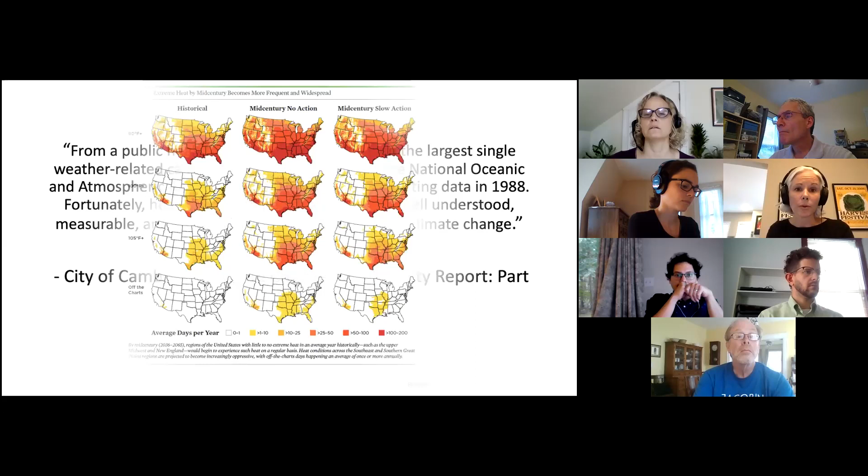First and foremost, heat is a real public health issue, and it's been acknowledged for a long time. It's been the largest weather-related cause of death in the US since NOAA began reporting that data. But the good news is that it's understandable and potentially preventable, and it's something that different groups around the country, as well as locally, are starting to grapple with and really get their hands on as it relates to understanding how it's going to impact them.

Here we've got some images from a report that the Union of Concerned Scientists issued recently. This is more the national perspective of what's happening as it relates to climate change and changes in temperatures and extreme heat. You'll see here one of the ways folks are representing some of this heat risk and challenge that we're going to be addressing across the country.

The row to the left here is a map of the United States showing historical heat challenges. On the top, what you're seeing is 90 plus days, areas that have been experiencing temperatures above 90 degrees. If you look at the middle row, what we're looking at are the challenges we're going to experience if there are no actions taken as it relates to mitigating our emissions and the impacts of climate change.

On the right-hand side, you'll see slow action. That's really if we're making incremental strides towards reducing our emissions, but we're still going to see impacts as it relates to the extremity of the heat that different areas of the country are going to face over time.

We're concerned about those 90 plus degree days and extreme heat conditions, but we're extremely concerned about the ones that start to hit above 100 degrees. Those are the ones where we're really starting to grapple with severe risk of death from heat.

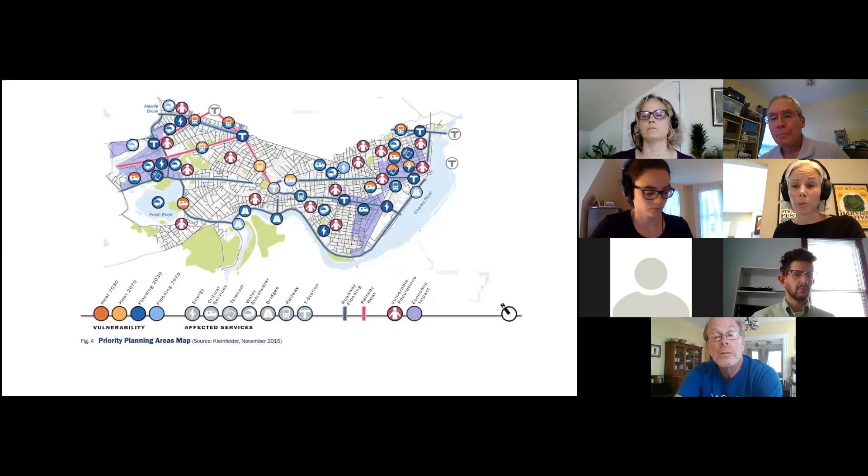Here's some information: quick on the heels of Cambridge's studies, the City of Boston began their work in really assessing vulnerability related to climate change. Again, heat became one of those issues where when folks started these studies, they were really much more focused on sea level rise and precipitation-related flooding events. But I think what these studies did was really focus people's attention on heat and how important it is that we pay attention to and protect people from it.

So the University of Maryland has this great tool on their website where they essentially allow you to select your city, and based on emission scenarios and projections, they'll tell you what the climate of that city is likely to be like in 2080. I think it's really impactful that if you type in Boston, Massachusetts, even under low emissions scenarios, we're looking in 2080 at a climate more like that of Maryland.

And the reality is we're ill-prepared for that. Historically, our buildings have not been designed with cooling in mind. So many of our existing buildings have failing, if any, infrastructure around cooling, and it's going to become a major issue.

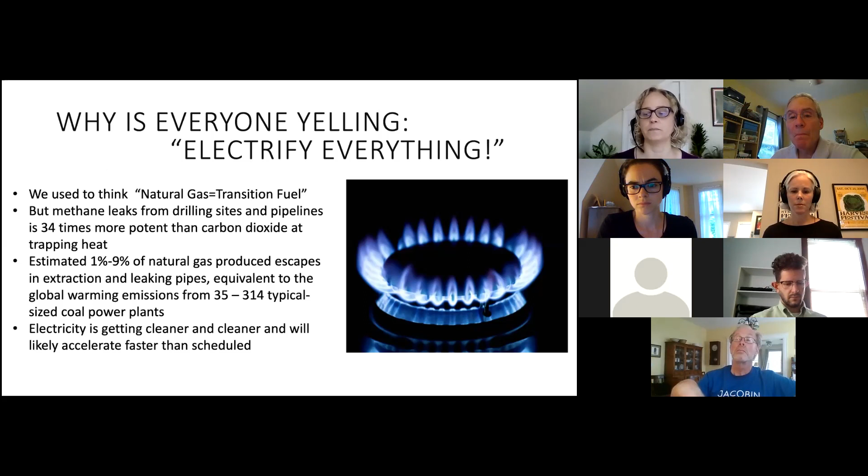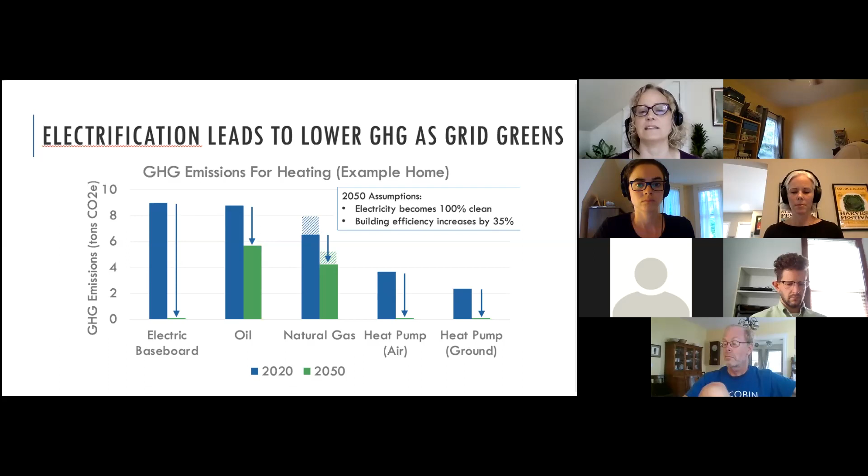And so new construction, I think, is changing really fast. It's very interesting. Just maybe 5 years ago, you wouldn't have seen very many new construction projects heating and cooling with all heat pumps, but that has transitioned very, very quickly. I did a recent presentation where I pulled 30 projects that I know of that are doing all heating and cooling with new construction with heat pumps. It's really becoming industry standard in multifamily in particular. So that's pretty much the slam dunk, is the new construction.

And I think that's why you see these communities saying, let's stop digging a hole for ourselves. You don't want to invest these new buildings for 25, 30 years in natural gas. Let's try and get them as much electric as we possibly can. And luckily, the reason you see the transformation is with a good new construction envelope. So even stretch code, and certainly when you go to passive, you're not talking about higher operational costs necessarily in a big way. And the other thing is that even upfront construction costs, when you cost out the 5 or 6 different options you can have for heating and cooling, heat pumps usually show up in one of the 2 lowest cost options.

Next slide. So as we get into the details of what different cooling strategies are, I would encourage you - well, I'm going to take off my MassCEC hat. First of all, I come from an affordable housing background, and I also am very active in Green Newton. And so I'm not speaking for MassCEC here, but it's really important that we all collectively look at policy changes that are happening and take advantage of those and push for policy changes that are going to help with this.

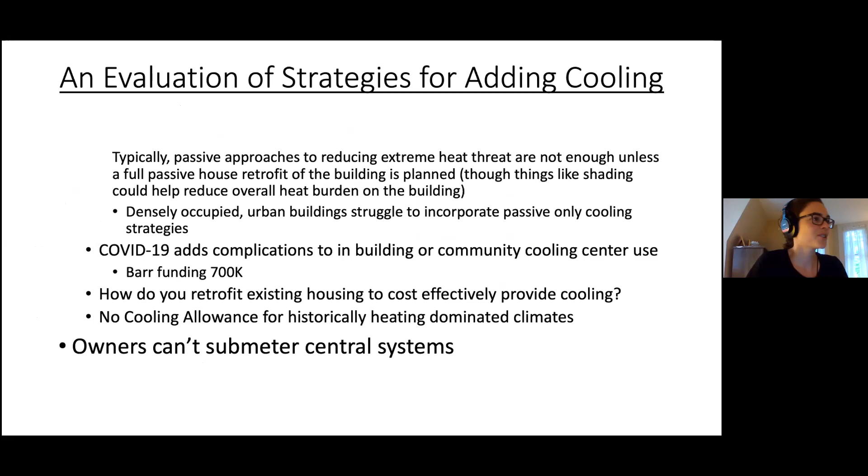Sounds good. And so Bev really started some of this conversation around some of the factors related to adding cooling to existing affordable housing. I think one of the things we hear oftentimes is folks asking about whether or not passive strategies to mitigating heat impacts on buildings are sufficient. And we're enormous fans of passive strategies around both heating and cooling.

We're working on a lot of passive house projects. I think we'd be the first ones to line up to help you all with figuring out how to retrofit your existing building to a passive house standard. But the reality is, as we look at the implications around extreme heat, passive approaches can help a building navigate some of those extreme heat issues. They're not going to solve them. And you're fundamentally not going to change those critical indoor conditions that lead to heat-related illness and potentially death related to heat through addition of shading devices in most situations.

And so the reality is we are looking at how to retrofit these buildings for mechanical cooling systems. I think COVID-19 has added additional complexity to this. I'm really interested to hear about people's experiences from this summer. I know, at the beginning of the summer, there was a lot of discussion around how to navigate making sure that people stayed safe during extreme heat events. With COVID-19...

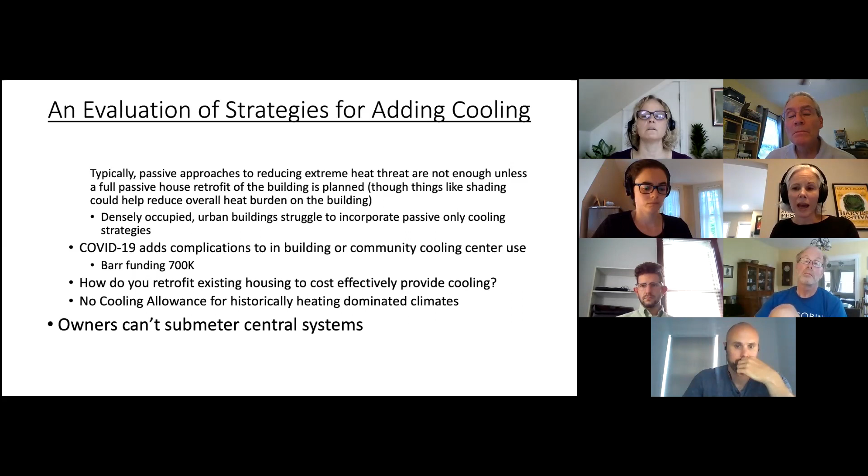So some of this information came from my engineering team, who is doing ASHRAE level 2 audits quite a bit on existing buildings, helping people think about ballpark pricing around some of these measures for integration. Starting at the very straightforward implementation of a window AC system, all the way through these much more complex air source heat pump systems that can do not just cooling, but heating and cooling, accomplishing some of the goals around electrification of heating systems that Bev was just talking about.

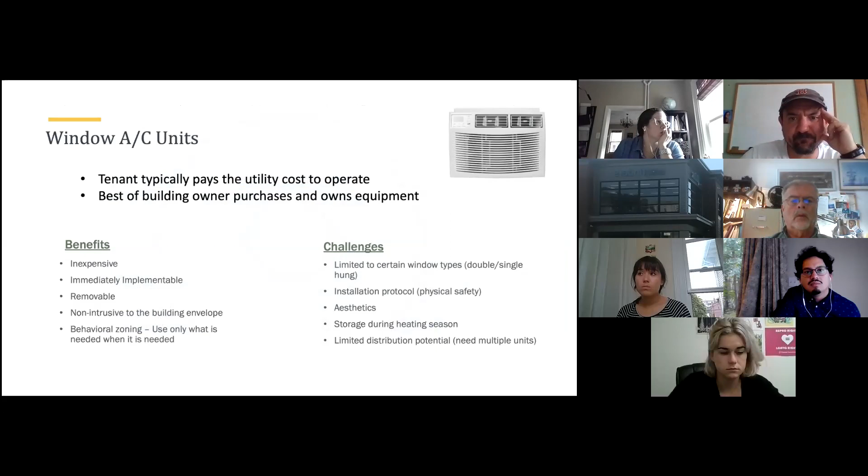Lauren, I'll just note that Andrew DeFranza is bringing up a good point about cost of all electric. So that's something we can definitely cover as we move toward all electric. How do we pay for it and make sure we're being supported in the state's carbon goals? Yeah, that's a great point.

I think Bev addressed a couple of those things already as it relates to working to try and make the carbon neutrality goals part of the equation as it relates to how MassCEC thinks about their efficiency standards. That could help with some of these strategies that are also electrification strategies and maybe could offset some of the cost associated with those.

I think there's potential for the costs here, actually, what we've identified here is really sort of the capital costs of the actual system and the installation costs. One of the things I know Andrew's been grappling with on one of his projects is related to potential electrical service upgrade costs. And that's variable among these different strategies as well.

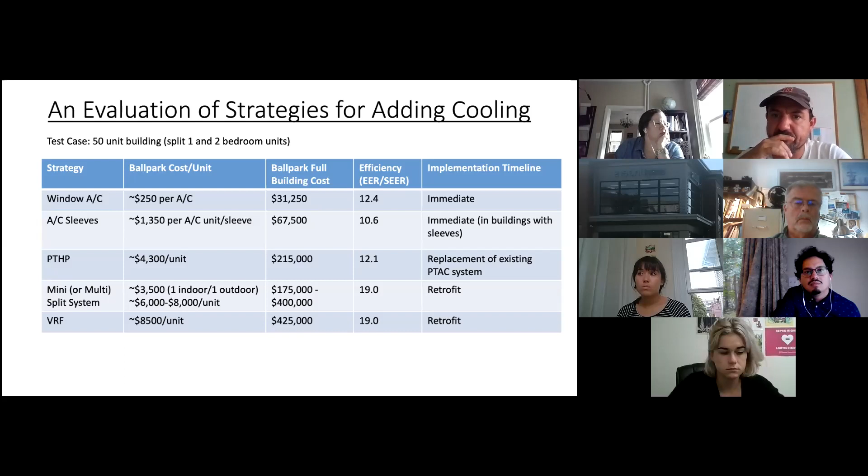If you're implementing window AC units, it's very likely that your building has the electrical capacity to handle that. Obviously it's not a given, you'd need to look at each building case by case. But for some of the more extensive electrification strategies, where you're now taking the energy load previously supported by natural gas and putting that on the electric utility, there could be upgrades required and needing to be paid for associated with that too.

So this is by no means comprehensive and exhaustive as it relates to the costs associated with this, but it's really meant to give people a sense of the scale and relationship of the actual equipment and install costs between these options and the different levels of efficiency and how quickly they can be implemented.

Just to add on Andrew's point that sometimes you've got to upgrade as well - I'd say the first two of these you can do without triggering the utility's attention. If you're using these only for cooling, the first two don't trigger the utility's attention. I'm not sure about PTACs, they may or may not, but mini splits and VRFs do. That's where you sometimes get hit.

My understanding, actually - I see Nate on this call who used to work at Eversource, so he might know even better - but I know Jane at HRI has been hit often. You basically have to pay for a lot of the resiliency requirements for the whole neighborhood to add these kinds of things, which is not really fair and not moving us in the right direction, in my opinion.

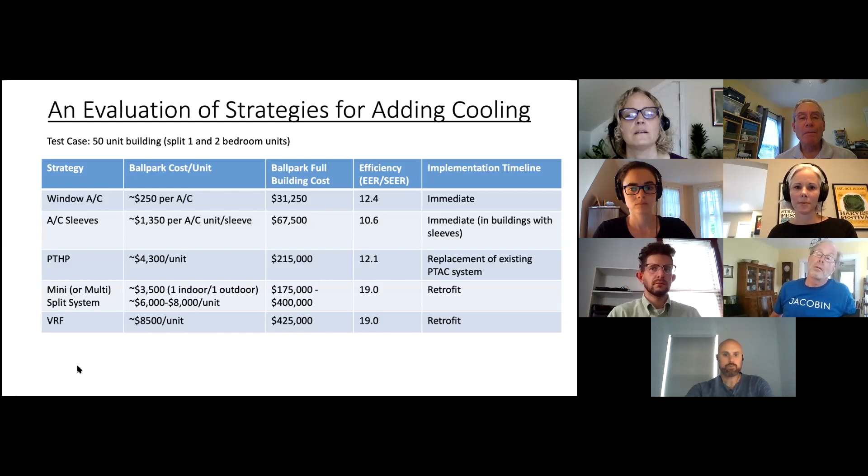All right, so let's start with that list and talk these through.

I think everyone's very familiar with window AC units in terms of thinking about who bears the utility costs, the operating costs associated with those. Typically it's on the tenant, unless your building is master metered for electricity, in which case it would be an owner responsibility. That obviously needs to be factored in as you think about the capital cost as well as the operating costs of these different systems.

One of the things that can be challenging with window AC units is there's a lot of variation in the efficiency of these units based on their age. So what we're recommending at this point is that it's best if the building owner purchases and owns the equipment and is also responsible for the management, maintenance, and installation of that equipment.

So in terms of the benefits, it's inexpensive, you can implement it immediately and get the health benefits immediately associated with it. It's removable, non-intrusive to the building envelope, since you're using your existing window opening to incorporate the system. And Bev had a really good point on a call earlier today - with window AC units, typically you see individuals taking on more behavioral zoning independently, especially if they're paying for the cooling themselves.

If they're not in their bedrooms during the day, they turn off the AC units in their bedrooms and turn them on in the living spaces, and vice versa at night. So you tend to see a bit more of that positive behavioral feedback as it relates to independently zoning the systems and only using them in spaces when those spaces are in use.

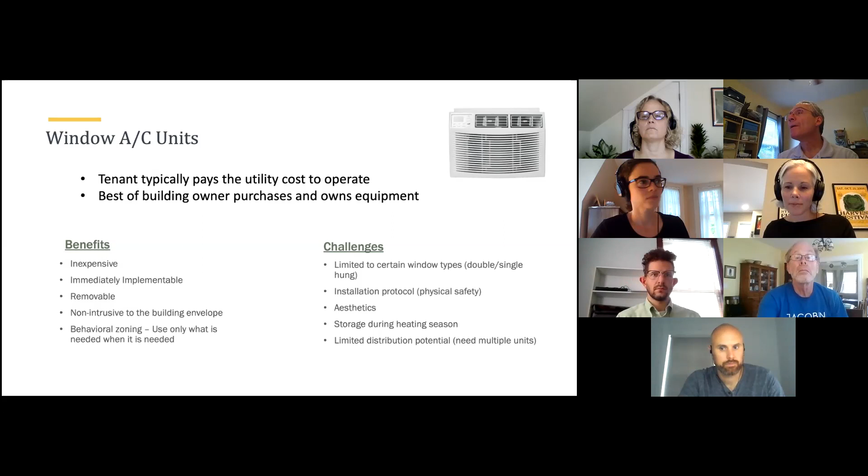Any other thoughts on the window AC units? Not from the chat. All right, so a variation on the theme is the AC sleeve.

We see these in a lot of existing buildings. They're pretty ugly, but essentially it's a hole cut through the building envelope adjacent to the window or other doors, a sleeve is installed, and then a specific type of air conditioning unit is put into that sleeve.

Again, the benefits are that it's inexpensive and you're not interfering with windows. The safety protocol around it is a bit more straightforward. You can winterize these units with them in place, making sure you're infilling with foam and gasketing around them, so you can store the unit in place, which helps a little with space.

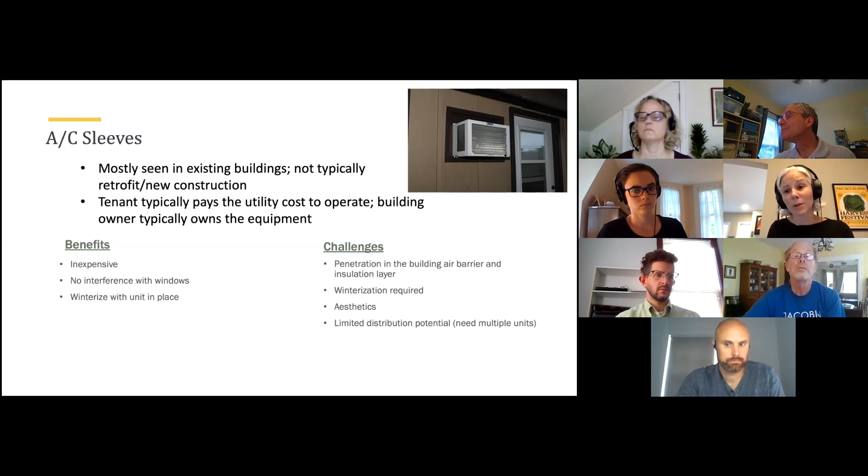But when you cut these holes in the building envelope, you're penetrating your air barrier and insulation layers, which again results in additional heating load on the building. You do have to winterize them, and they are also not pretty, with similar distribution issues as the window AC units.

So pretty much everything that cools is a heat pump. Your refrigerator is a heat pump. The idea is that it's a compressor and refrigerant-based cycle where you're essentially using refrigerant to transfer heat from one space to another. In cooling mode, you're pulling heat from the indoor environment and sending it outside.

Some of the newer generation heat pumps that can also do heating are essentially able to reverse that cycle. So while your window air conditioner can't, some of these next options we're talking about, air source heat pumps, can. They have valves that allow them to reverse their cycle and essentially extract heating energy from the outside air, bringing that into the space.

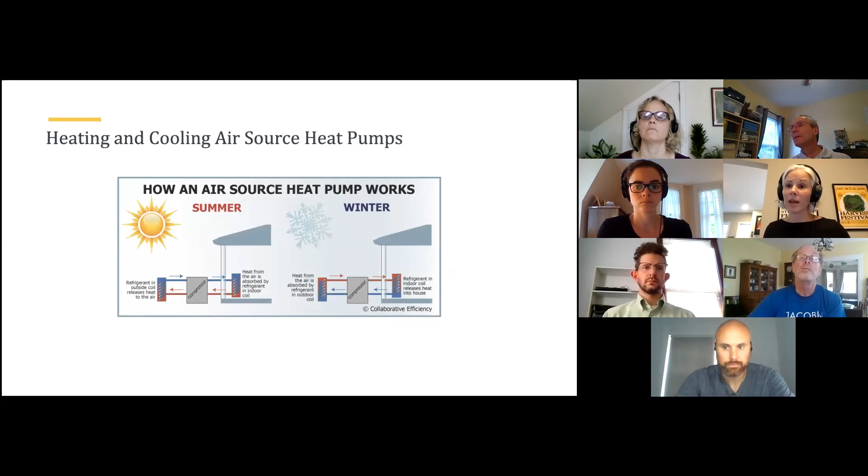And so a PTHP, I think folks are probably very familiar with the terminology around PTAC, those sort of hotel room type systems. We don't see a ton of them around here, but I wouldn't be surprised if folks on this call have a building or two with them in their portfolio. It's a packaged terminal air conditioning unit that typically does both heating and cooling.

It essentially is a big penetration in the exterior envelope where you sit the system from the outside. It looks like a grill, so it doesn't penetrate out the same way a sleeve does, but there are aesthetic implications to it. Typically, the cost of that utility is on the tenant to operate—it's on their electric bill at the unit level.

The good news is that for folks who have properties with PTAC systems, there is an upgrade option that can essentially use the same space and approach as the current PTAC: the packaged terminal heat pump. It's a more efficient version of that system, definitely more expensive than replacing it with a standard PTAC, but quite a bit more efficient from a heating and cooling perspective. So that's something that should definitely be considered.

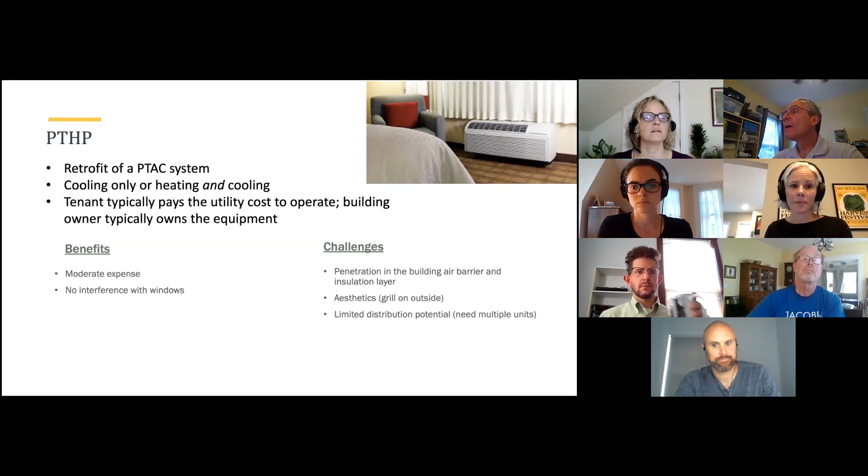Most of the projects we're talking about, around figuring out how to electrify existing buildings, are going to be thinking about that within the context of either mini split air source heat pumps or VRFs, which are the next two system types we're going to spend a little time talking about.

The interesting thing about the mini split air source heat pump is that you can use it as a cooling-only strategy. So if you weren't in the market to electrify your heating system for one reason or another, but you did want a more efficient system in terms of cooling at your building, you could implement a cooling-only mini split air source heat pump system.

Typically there's one outdoor unit to one indoor unit in this type of system, and the outdoor unit is tied back to the electric meter at the apartment. So as long as the building isn't master metered, tenants are paying the utility for that. People like this compared to some of the earlier options because now you're just looking at a small refrigerant line penetration into the unit. Aesthetically they're much more pleasing and less invasive to the building envelope, and they're quite a bit more efficient than some of the other options.

In terms of challenges, if you have large buildings with many units, you need to find a place to put these outdoor units. Typically they get put on roofs or patio areas, so depending on the typology of your building, you'd need to find space for them. Ideally you want to minimize the length of the refrigerant run from the outdoor unit to the indoor unit, which may mean they're somewhat distributed around the outside of your building or up on the roof.

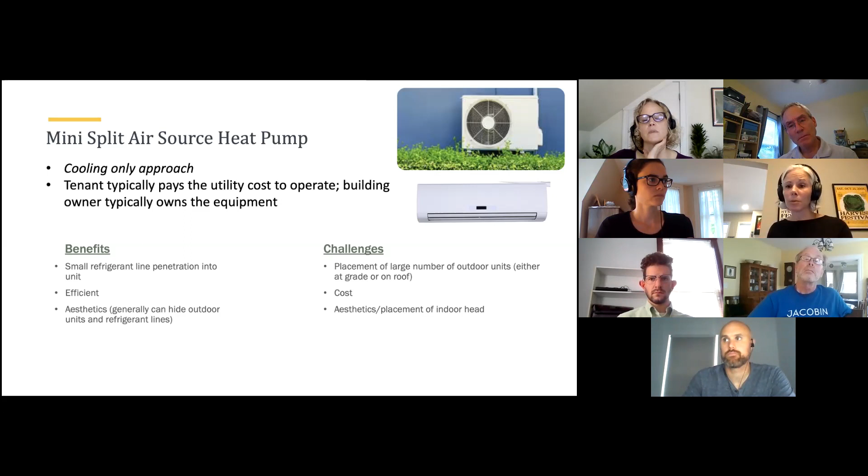For cooling only, with one outdoor unit to one indoor unit, Bev and I were talking about this, and for $3,500 to $4,000 a unit you can basically get that system. Where it starts to get a bit more expensive is when we talk about using these mini split or multi-split air source heat pumps at the unit level to do both heating and cooling. If you remember the chart we were just looking at, this was more in that $6,000 to $8,000 per unit range.

Here you're actually using that outdoor compressor in both cycles, the heating and the cooling cycle. Again, your tenant is paying for utility costs, so now that's not just cooling related, that's also heating related for your unit.

There are some interesting things you can do when you implement mini split air source heat pumps into existing buildings, though there are potential challenges too. For example, if you have a building with a central hydronic system and you want to integrate a mini split air source heat pump system, you can do cooling but also heating at times of the year when outdoor temperatures make the system run really efficiently. You can come up with a hybrid approach where you use your air source heat pump in heating mode during shoulder season temperatures, when it's most efficient for reducing carbon and cost, and then transition to your fossil fuel-based existing system when outdoor temperatures drop really low and the efficiency of these all-electric systems decreases, to mitigate cost implications. We definitely see folks doing that.

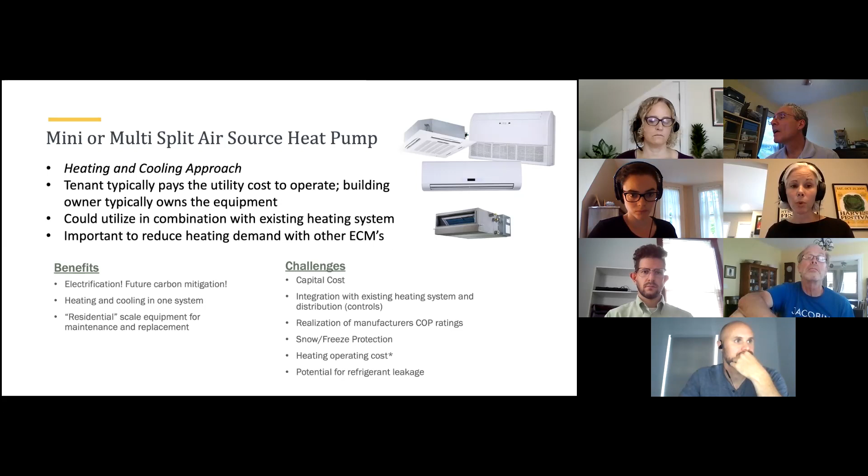We've put in some assumptions around the cost of a therm of gas, as well as the cost of a kilowatt hour. This obviously varies across the state, so you'll want to look at this specifically for your projects and utility rates. For this example, I've put in $1.20 a therm, about 24 cents a kilowatt hour for electricity. Then you put in some basic assumptions about the efficiencies of the two systems you're comparing.

For heating system efficiency, we generally put in about a 70% efficiency, which is a combination of equipment as well as distribution system efficiency. For the air source heat pump, what I've assumed here is that we're going to get to that coefficient of performance, or efficiency, of 2. I think that's a pretty reasonable assumption based on some of the research coming out of the field on these systems.

So you look at what your heating load is for your space. Here what we've used is 700 therms. So if we were heating the space with natural gas, it was taking 700 therms to do that in a heating season. What we do is convert that to kilowatt hours and then look at the implications as it relates to the efficiency of the electric system. You'll see there's the conversion to kilowatt hours, and then there's a modification factor as it relates to the proposed COP.

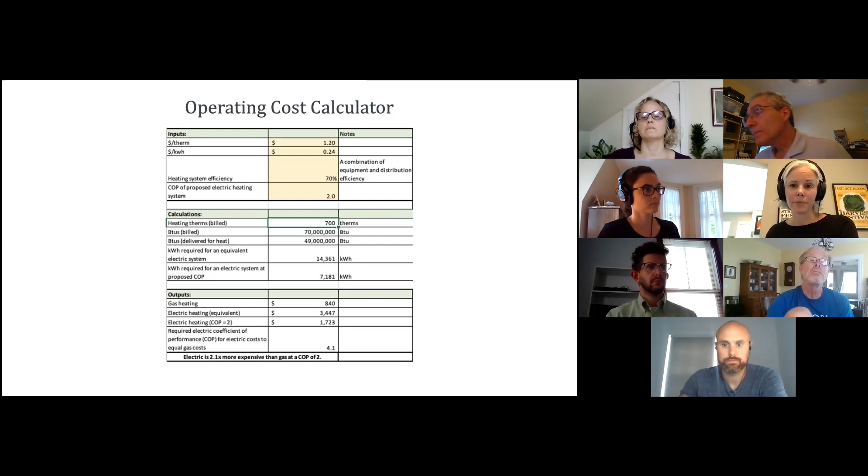The last technology we wanted to talk about is the VRF air source heat pump system. This is also an air source heat pump system, but it's centralized. So instead of one outdoor unit for each indoor unit, we're talking about a centralized plant, essentially up on the roof, where refrigerant lines run from that plant down to indoor distribution systems. It has very similar issues to mini-split and multi-split systems as it relates to the basic technology.

What we're seeing is these VRF systems typically have higher coefficients of performance - the manufacturer's curves tend to be a little better than standard mini-split and multi-split systems. We haven't yet seen a ton of field research on the actual coefficient of performance these systems are achieving, but it's on the radar for organizations like NEEP to start field verification of those COPs soon. Generally, folks assume these systems achieve much higher coefficients of performance for a variety of reasons.

Same drive applies to bring the heating energy load of these buildings down as you implement these systems. Typically in this scenario, the owner pays the utility costs to operate. Bev mentioned that before as one of the challenges - you'd be paying heating energy in a system like this, which is pretty comparable to traditional central heating mechanical plants, but you're also paying for cooling. Right now there's no allowance or way to be compensated for that. Hopefully there's more to see and hear about that as folks at the federal level start to realize this shift in climate and temperature in northern areas.

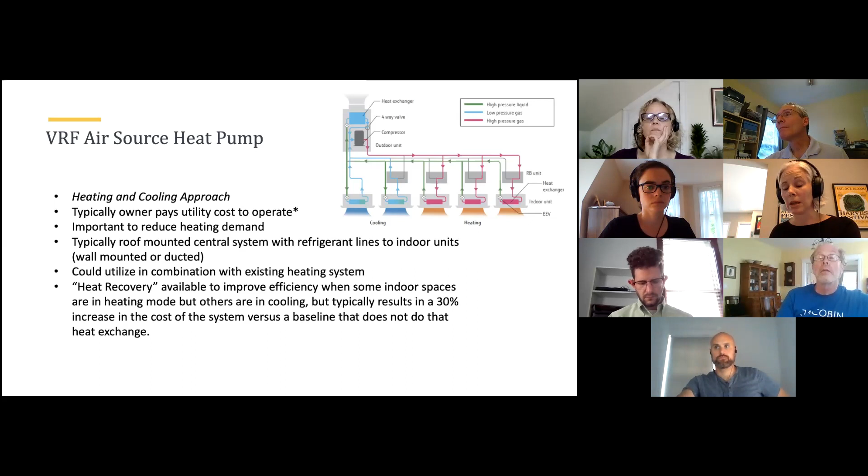So again, we get all the same benefits of electrification and carbon mitigation out of this type of system. You get one central plant, typically on your roof, doing heating and cooling. It's a more compact footprint than mini splits typically are, so you're saving roof space for solar, which is a really good benefit as well. And typically these systems are more professionally designed - the manufacturers are involved in the design, so there's a greater level of confidence in the design and installation and its ability to achieve performance.

Again, the most expensive system we have here on the list. You can also integrate this with existing heating systems, but the controls component is really important and can be somewhat complex. We're yet to see the realization of manufacturer COPs. Still the same issues around snow and freeze protection, so needing to build these systems up high enough so they're not sitting in snow. And similar issues - if we were to convert that equation we looked at earlier to higher COPs, we would see less increase from the electrification associated with that. So that's what we expect with these VRF type systems.

One of the caveats with any of these refrigerant-based systems is that refrigerant leakage is actually a major contributor to climate change as well. So making sure the systems are designed and installed well is really important. We hear horror stories of these systems being charged improperly and leaking their full charge before they find the leak and are able to seal it up. You can actually undo quite a lot of the potential benefit you're trying to create from a carbon mitigation standpoint if you're not very careful around the refrigerant component of these systems.

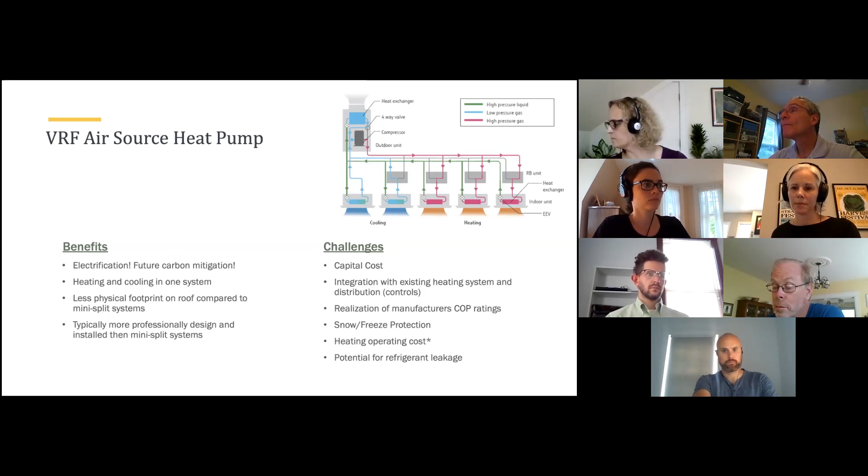So there are also other flavors of heat pump based electric heating and cooling. We're seeing more and more interest on the new construction side around air-to-water VRF systems as a way of mitigating and reducing the amount of refrigerant these systems use while still maintaining efficiency. Ground source heat pumps are also gaining traction in the conversation around electrification. Our experience has been that it's still expensive on the capital side to drill the wells you'd need for this, but these are extremely efficient systems from the perspective of their overall electrical use as well as their carbon implications.

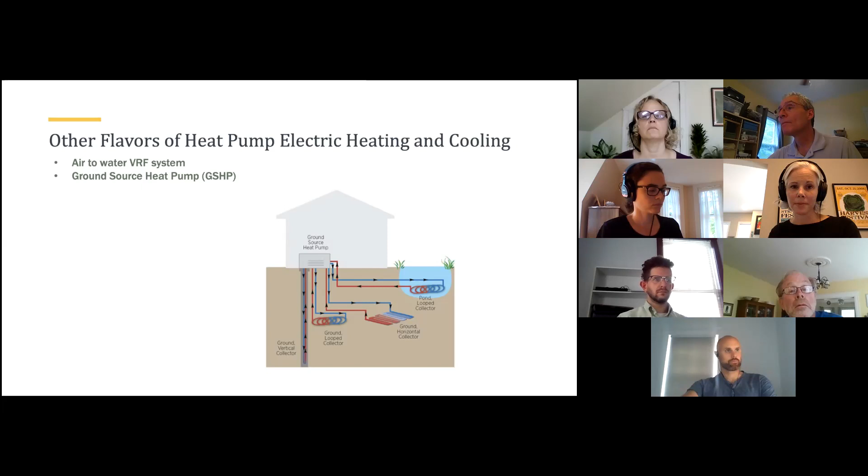All right, I think that's what we had for the full presentation here. Emily, you've been very quiet - are there any comments or questions? Thank you so much, that was great.

So Michaela, I think from Worcester Common Ground CDC, wanted to learn a little more about the LEAN program, the mini split subsidy program from the LEAN program.

Yeah, sure. MassCEC actually funded a pilot of 67 retrofits of electrically heated units to mini splits to demonstrate to Mass Save and the LEAN program that it was cost effective. They found it was very cost effective, and so now they cover that as a free measure under the LEAN program. So if you have electrically heated units and you're interested in getting mini splits, you just need to apply to the LEAN program - there's an online portal where you put properties in. If you have more than one, I'd recommend a portfolio approach. Feel free to reach out to me - I've done that a bunch of times, especially if you have a variety of big and small properties; sometimes that's an easier way for them to handle you.

Nate from POAH had a question about Wi-Fi based controls on AC window units or AC sleeve units for common areas, or owner paid resident AC units, if anybody had experience, good or bad.